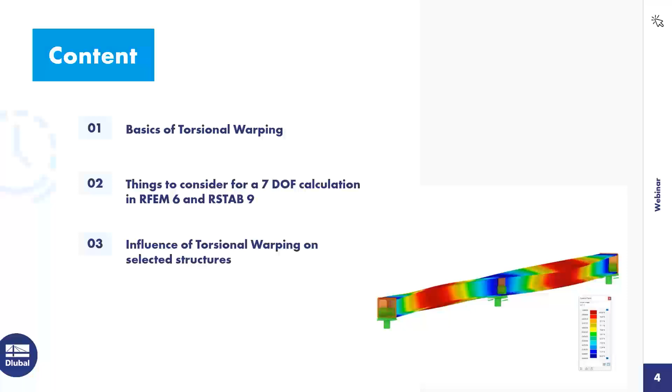So let's start with some fundamentals. In the general case, a beam that is loaded in torsion will experience twisting, shown on the right side if we look from the front on this distorted beam, and warping. If we look from the side, we see the warping deformation. This combined reaction to a torsional load is described as mixed torsion.

In a conventional spatial beam analysis, only 6 degrees of freedom per node, at each member end, are considered in the analysis. These 6 DOFs are made of 3 displacement degrees of freedom and 3 rotations. Warping is usually not part of the solution, and this is not special to our software, but is in fact the standard convention in most software solutions.

In RFEM and RSTAB, we can, however, very easily activate the 7th degree of freedom by just activating the torsional warping add-on. You may now ask why warping is not considered by default, when the general case for beams under torsional loading is mixed torsion, which also needs to consider warping. In fact, there are many practical cases where we can neglect it without making a huge error, and we will talk about that today. But before we get into this, we want to discuss the main features of the two load-bearing mechanisms activated and shown here on the slide: twisting and warping.

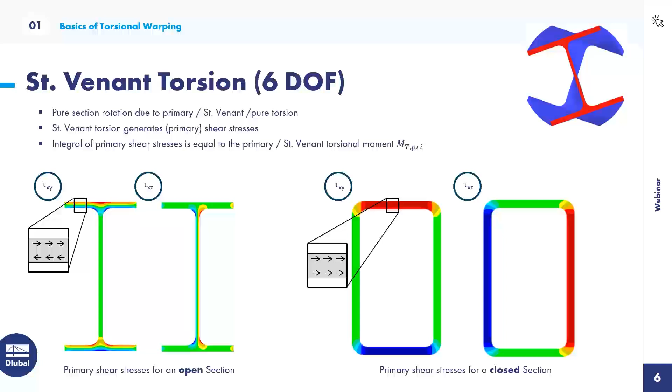Also, the shear stresses are oriented in the same rotational direction, and as a result, the primary torsional shear stresses are usually much smaller in closed sections compared to open sections when applying a similar torsional load. The integral of the primary shear stresses is equal to the primary torsional moment, mt pri.

Similar to axial bending stresses, the axial warping stresses need to be balanced by shear stresses. Those shear stresses that are required for equilibrium are called secondary torsional shear stresses.

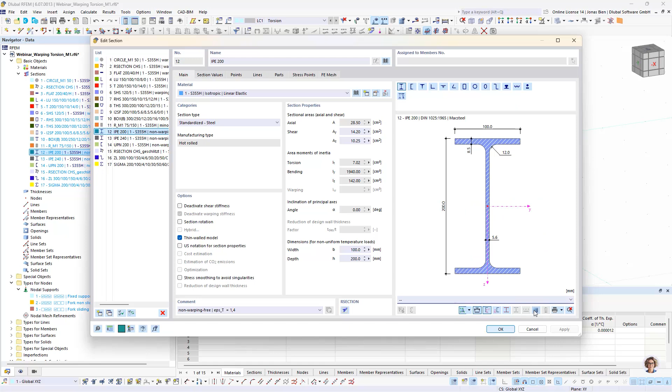Therefore, you just go to the section dialog, and underneath this figure here, you can see there are a lot of functions built into RFEM where you can assess something like unit stress distribution for finite element analysis. That's where the section is discretized in 2D elements. You can check the mesh here by clicking on this little mesh symbol.

And here you get, for example, the unit stress distribution over the profile for the primary torsional moment. Or you can check the same information for the thin wall analysis results, where we assume that the stresses are constant over the thickness and that the stresses are not zero at the edges. So this is also quite nice.

And we have access to several other functions, such as the warping, torsional warping function, and so on, that is affine to the warping deformation and the actual warping stresses if warping is restrained.

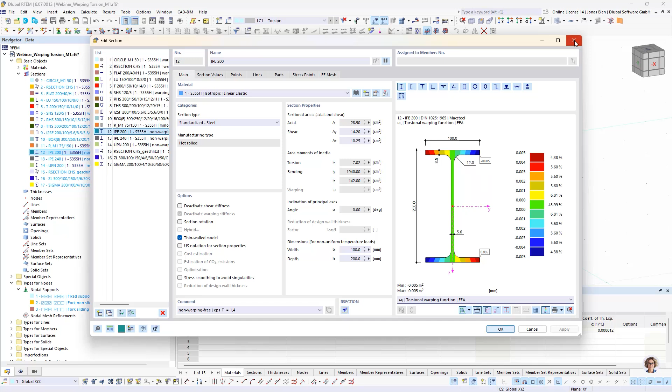Okay, but for now, before we start anything crazy here, let's go back to the presentation, because we have to clarify one or two more things before we go to the first example. All right, so what have we here?

This is basically, so we were talking about the primary torsional moment and the secondary torsional moment. In the introduction, I said that the general case has both of those parts, one from primary torsion and one from secondary torsion, and the overall torsional moment makes up of those two components. However, quickly the question arises how the relative magnitudes of the primary and the secondary torsion can be determined. So how are they distributed, both parts?

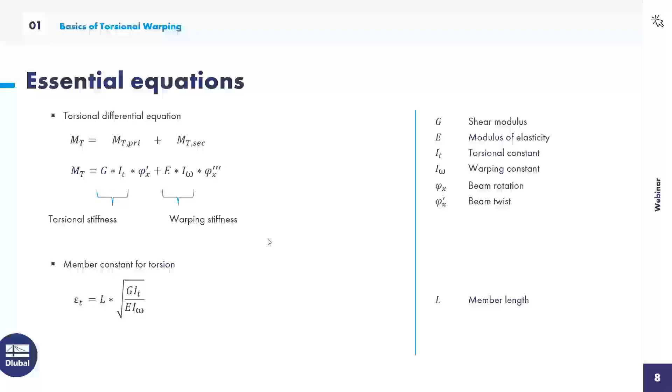So we clearly see that the section choice impacts whether warping torsion is relevant for our calculation or not. And for that purpose, it's common to categorize the sections that are available into 3 different categories, which I want to just quickly show you here.

Sections with a warping constant of 0 are called warping-free sections. Such sections do not show any warping deformation and remain plane under torsional loading. So the following sections are perfectly warping-free: the circular hollow or circular solid section, thin-walled cross-sections whose profile center lines meet at one point, like this L profile or the T profile, quadratic hollow sections with constant thickness, or which is a rather special and academic case, but some rectangular hollow sections with specific height to width and thickness ratios.

Then there is the second category, and that's the category of minor warping cross sections. So the warping stiffness of such sections is not 0, but relatively small compared to the torsional stiffness. Although a universally accepted definition of what is relatively small is not available, or at least is nowhere fixed in some standards, it is usually acceptable in civil engineering applications to neglect warping torsion for members with an epsilon t value or member constant for torsion value greater than 10.

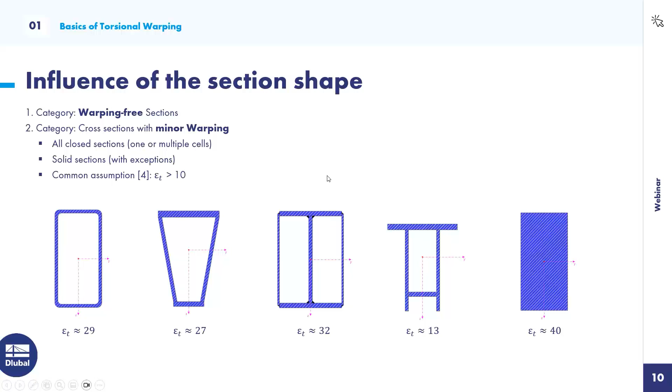So it's rather interesting for thin-walled sections made of steel. The category that is really affected by warping torsion is the third one, the non-warping-free section category. All open and thin-walled sections that do not belong to the first category of warping-free sections are actually non-warping-free sections, and they show significant warping effects under torsional loading.

Some very prominent steel sections, such as the I profile or the U profile, belong to this category. Also, cold-formed thin sections are very prone to warping, and you can see that the warping member constant, or the torsional member constant, is much lower than 1. So in some cases it's rather recommended for such sections to neglect the primary torsion rather than the warping torsion.

Now that we have gained some theoretical background on the influence of the section shape on warping torsion, we can move over to RFEM to make our first example and see if we can back up the information that we just gained with some simple example calculations.

So what have we learned until now? We have learned that we have 2 different types of bearing mechanisms for torsional loading: St. Venant torsion or primary torsion, and the secondary torsion, which goes along with warping torsion. And then we have an influence of the section, where we have 3 different categories, and only non-warping-free sections are, or can be assumed to be, prone to warping. We will check that out now in RFEM.

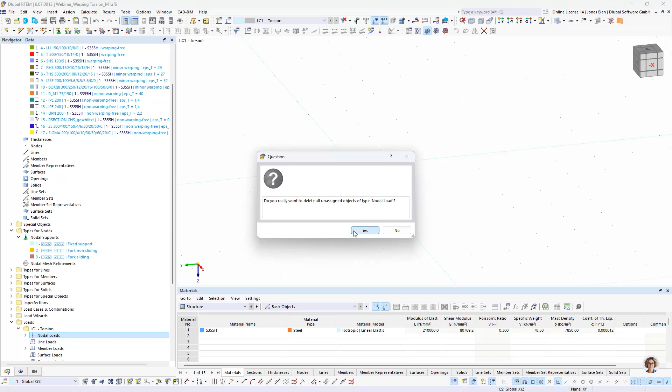And I have a first load case that shouldn't actually have any loads, so let's just delete those loads. And the load case does not have any self-weight active, so we just want to investigate simple examples under pure torsion.

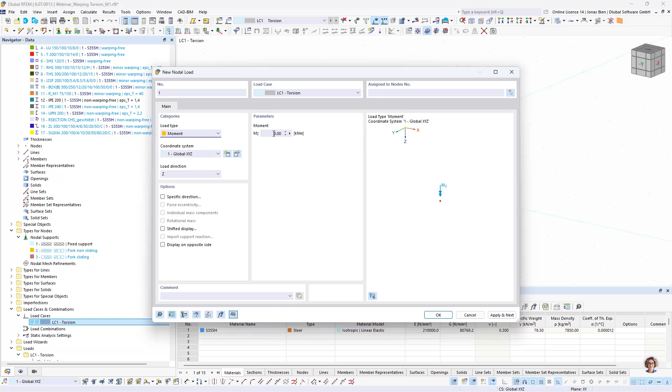So let's do so. I want to start with a very simple static system, and I want to model a cantilever beam with a non-warping-free section to see if we can already catch the influence of warping here in this very simple case. So I assign a fixed support to one of the nodes, and on the other end of this cantilever beam, I apply a concentrated moment of 1 kilonewton meter.

All right, and I think there's no add-on activated right now. So let's just do a blank calculation with 6 degrees of freedom to have some reference that we can come back to and compare the results with warping torsion active.

So I just click on calculate, and what we get now are the local deformations, internal forces, strains and stresses. But let's keep an eye on the local deformations and forces that are now calculated here. We can see that we have 6 of them — these are the 6 local deformations that are usually taken into account: 3 translational and 3 rotational.

And when we check those, it should only have rotation about its own member axis, about the x-axis. And when we look into the internal forces, we only have a torsional moment of 1 kilonewton meter, and this is constant from one member end to the other.

All right, so now actually let's add the 7th degree of freedom. Therefore, we just go to the base data of the model, go to the add-ons tab, and activate the torsional warping add-on, and run the simulation again.

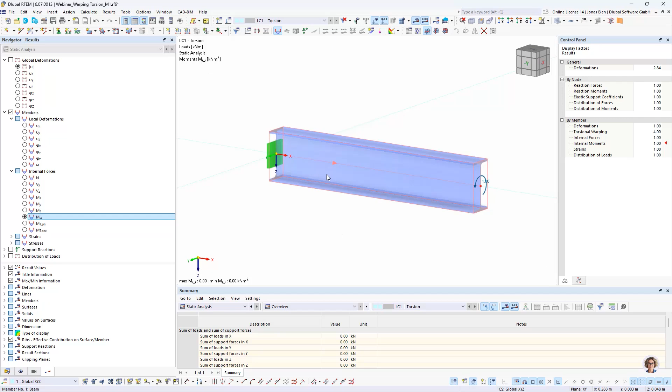But why is that? We just said that an I section is non-warping-free and is very prone to warping deformation and warping moments. So what happens here? Maybe that gets a bit clearer if we check the deformations here.

So we see that we have this twisting of the beam, but when we look from the side, and maybe let's scale this up a bit, we can now see that there's also warping in our section.

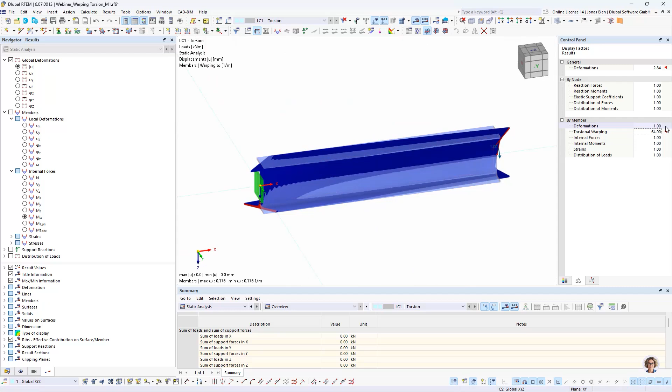We can actually see that the member warps at both member ends freely. We don't have any warping restraint here, and that's why this cantilever can freely warp at both ends. As long as we don't have any warping restraint, it's just deforming in this mode. But from this warping deformation, we don't get any additional forces or stresses in the beam.

So we can also check stresses. We don't have any actual stresses here. So what we need to really activate warping torsion is also to add a warping restraint. Let's see how we can do that.

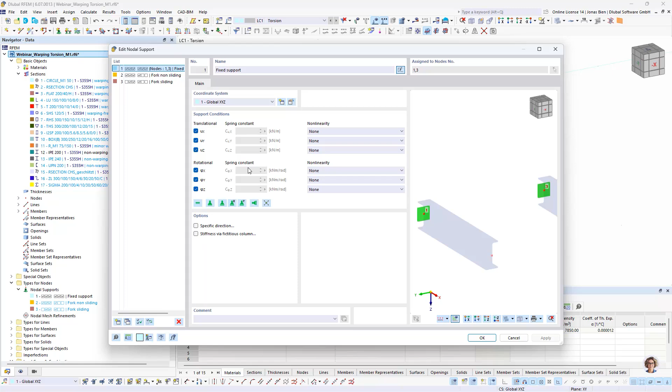I copy the cantilever, add a second one, and now I just want to quickly look with you into the nodal supports. But as you can see, even after turning on the 7th degree of freedom add-on, the warping torsion add-on, we still only have 6 degrees of freedom that we can constrain here in the nodal support. That's basically because the warping degree of freedom is highly a local one, and it only affects beams and not any like surfaces or volumes that you could also support by these nodal supports.

So that's why we actually put the warping constraint into the beam properties, attaching the warping degree of freedom to the member object. If we go to this member, I just double-clicked on it to open the Edit Member dialog, we can now set transverse stiffeners. Those are only available when we have design add-ons that use transverse stiffeners, or if we have activated our 7th degree of freedom.

And under those transverse stiffeners, we can define a new type of transverse stiffeners. Of course, we find some conventional stiffeners, what you would probably expect under this title, transverse stiffeners, some flat stiffeners, or maybe some angles or channel stiffeners. But what we also find here are warping restraints.

We want to take this to now add a warping restraint at the fixation of this cantilever, so at the left side. I just generate a transverse stiffener type with a warping restraint at x equal to 0, and I want to add a full analytical warping restraint. I could also insert a warping spring here and give some value here that I calculated based on maybe an end plate thickness or whatever. But in this case, we want to make it clear, and we want to have a full warping restraint. So I will just agree with that and say OK.

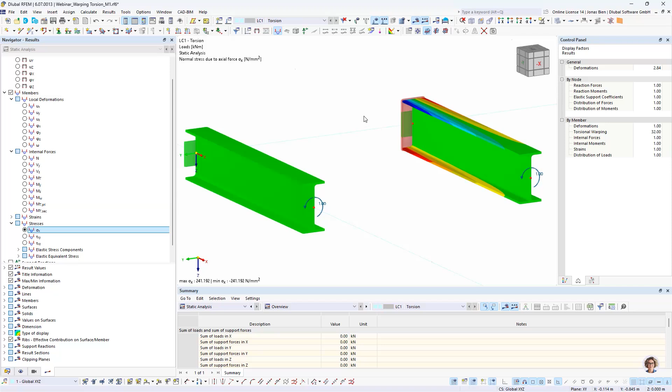We can also compare the rotation of both members, because what this warping restraint also does is increase the torsional stiffness of this member and the resistance against torsion. So we can see that at the free end of the cantilever, we now have rotations that are much smaller than in our reference system. It's more or less than half of the reference rotation.

So that's quite interesting. That means in this case we were actually now able to activate warping in the beam. So we needed a member that is non-warping free, and we needed a warping restraint.

So let's check what we have just learned about the different section types and add 2 additional cantilever beams with a warping restraint. We can keep that, but now we actually want to swap the sections for those additional members. And I want to model a section with minor warping.

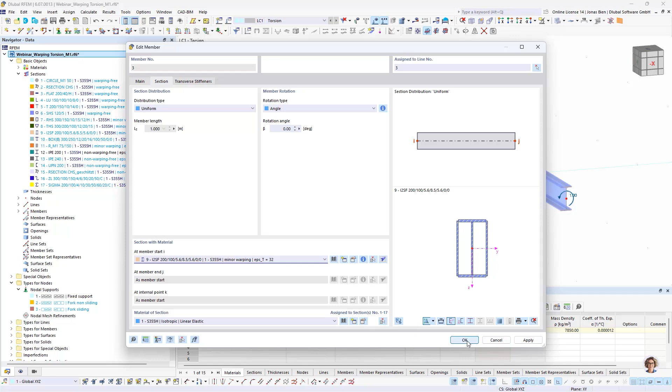So for that example, I want to take an I section with additional web plates, which makes a 2-cell section out of the I section basically, but it has the I section in the core with the same dimension as our IPE 200, more or less.

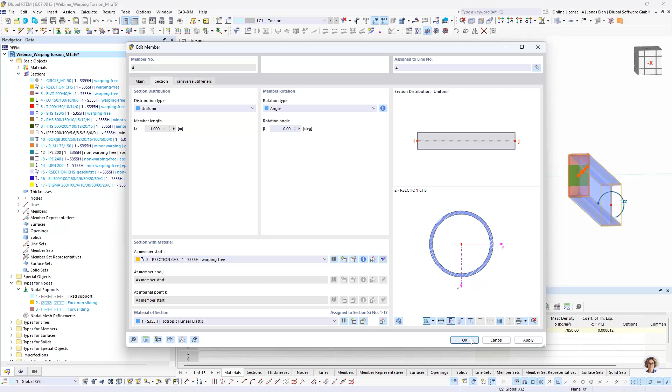And then let's also add a completely warping free section. So for that I want to take a CHS section, and now we can also compare how those 3 systems with a warping restraint, just with different cross-section, react to this torsional load.

So let's conduct the analysis again and compare how these different systems behave.

So again, just to check for sanity, we have a torsional moment of 1 in all cases, but the secondary torsional moment already in this case where we have the minor warping section is also 1 at the restraint, but in the vicinity of this restraint it very quickly vanishes. So that's actually what we expressed or what we learned about the decay factor.

We said earlier that sections with minor warping have a very high decay factor, and the secondary torsional moment vanishes very quickly in the vicinity of a warping restraint. And that's actually what we can see here by just comparing the member with an IPE section and with an I section and additional plates, which makes it a minor warping section.

And of course, if we then again think about the warping moment as the integral of this secondary torsional moment, the warping moment is much smaller than for the non-warping free section here.

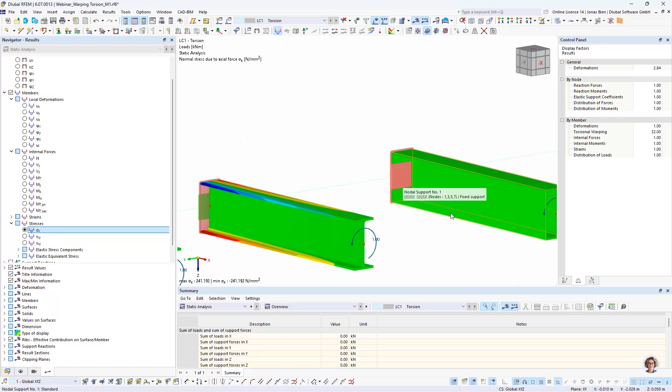And of course, this can also be seen when looking at the actual stresses that come from the warping restraint. So let's actually focus on this member just so we are able to see something on our scale. We have minus and plus 11 megapascal, which is just very small values compared to the 240 megapascal in our non-warping free section here.

And then go on with the warping free section. Here we actually don't see any secondary torsional moment, and of course, as a consequence of that, no warping moment and no axial stresses from this warping restraint, because this section actually doesn't warp at all. We can see that here also when we check the local deformations in the warping degree of freedom.

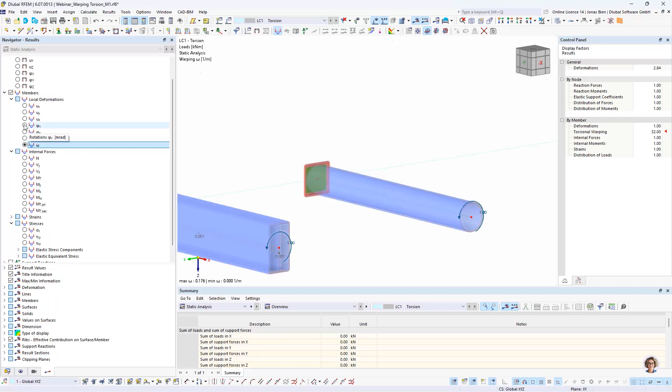And we can also compare the local deformations and see that our sections with minor warping or no warping—it's not perfectly comparable because this CHS section has a bit smaller diameter compared to the height of this section—but yeah, we can see the big differences between the rotations of these open sections and the closed sections.

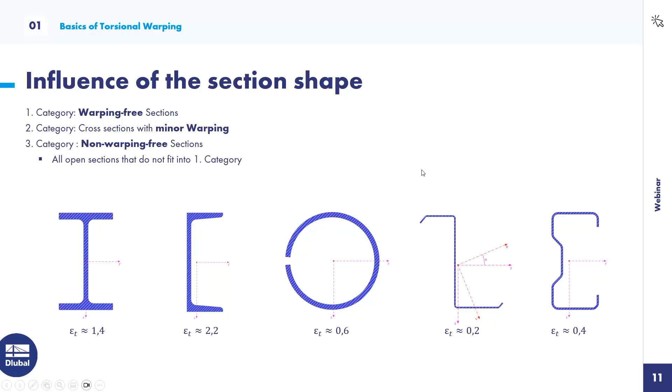All right, so now we learned not only about those different section categories and how they influence the effect of warping, but we also learned about the warping restraint. So we have now covered in the example a warping boundary condition, a full warping restraint at the end. However, there are additional cases or influences for a warping restraint.

So free warping can also be hindered by changes in the torsional or warping stiffness along the member. Here are two examples for that. For example, if we have a tapered member where the section size changes along the member, there we have a warping restraint basically—the neighboring sections restrain each other from free warping.

And the same goes for a discrete increase or change in torsional and warping stiffness if we actually include stiffeners along the member length. So such stiffeners can also act as a warping restraint along the beam, and we will also check this in the example.

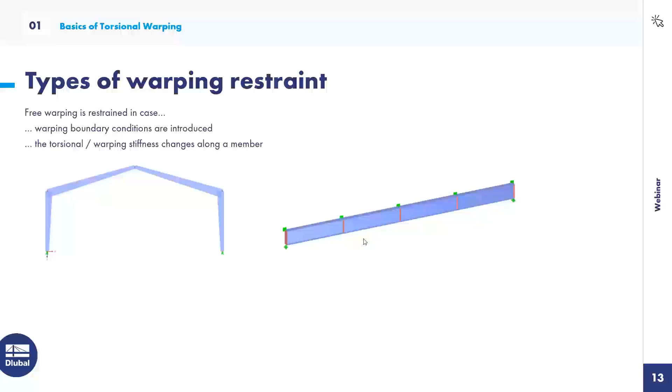But before we do so, let's check the third important type of warping restraint, and that actually comes from the loading itself. Whenever we have—so far in our examples, in the 4 examples that we have already modeled—we have just applied a concentrated torsional moment at the end, which means we had a constant torsional load over the member length. But in fact, all other loading types that result in a varying torsional moment along the member also introduce a warping restraint by themselves. So all of those 3 effects or parameters influence the reaction of a member that has a non-warping free section to our torsional load.

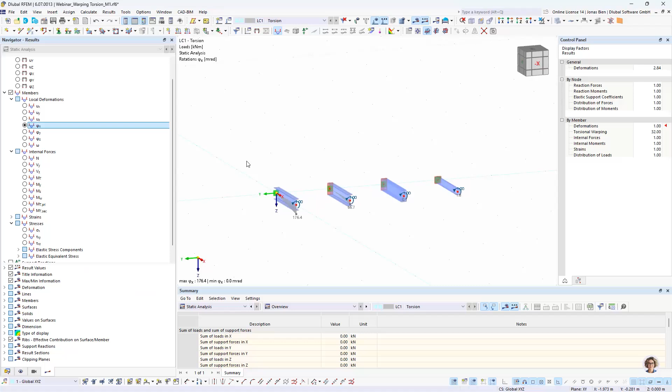What these cases have in common is that all of them lead to a situation where we have a non-constant twist over the beam length. Let's check this out and try how these other two additional types of warping affect the results. Let's go back to the model in RFEM and add some additional cases.

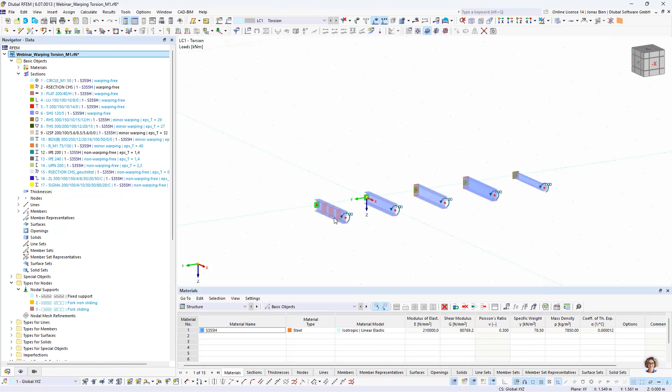We said that we have a warping restraint when we add transverse stiffeners along the member length. We can do that by activating transverse stiffeners, and instead of a full warping restraint, we now define, for example, flat stiffeners. Let's set the first flat stiffener at 25% of the member length, and add two additional stiffeners at 25% of the total length as distance between them. Let's increase the thickness of the flat stiffeners to 8 millimeters and assign it to this new member.

We can also check the influence of the stiffener shape, because that can be interesting. Let's add an option where instead of flat stiffeners we use channel or U sections as stiffeners, because these form closed cells along the beam length, and it's pretty safe to assume that those stiffeners have a higher restraint on the section. We can check that by introducing them and comparing the results for both cases. I've already defined this additional type of transverse stiffener, I just need to assign it to this member. Now we can see the difference of the stiffener shape.

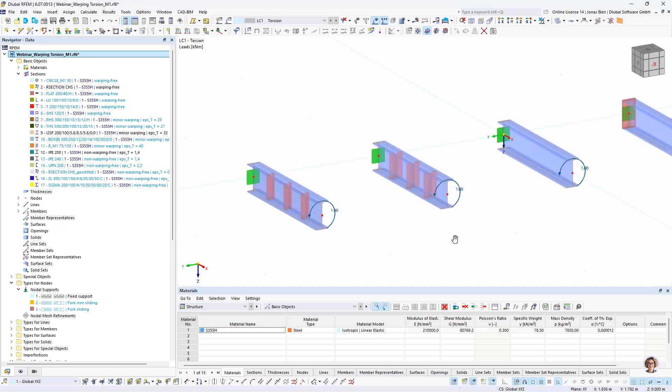Another example for changing torsional and warping stiffness can be a tapered member. Let's add an example to take this into account. We add another cantilever with a linear section distribution type, and at the member start we increase the member size to an IPE 240, while at the free end we keep the IPE 200. So this beam now has a linear cross-section distribution, from a small cross-section to a larger one.

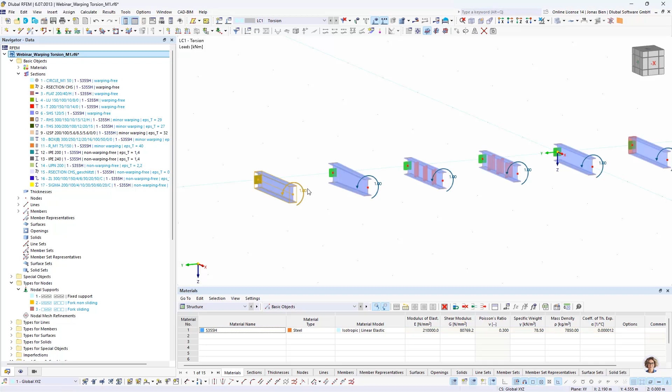Another warping restraint could be induced by the type of loading. So instead of applying a concentrated torsional moment at the tip, let's add an example where we apply a uniform torsional moment load along the member length, which will give us a varying torsional moment over the length of the member.

Now let's run this calculation and check how these manipulations affect the behavior, or the load bearing mechanism, in torsion. Again, everywhere we have a maximum torsional moment of 1 kilonewton meter, but let's check how much is now going into secondary torsional moment.

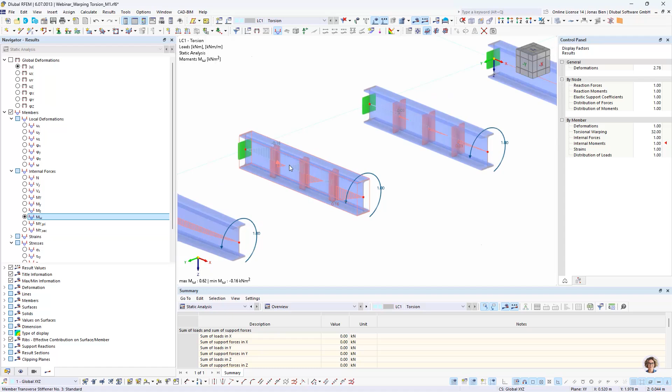With our transverse stiffeners, we have quite some share of the torsional moment now going into secondary torsion, and this share is much increased by introducing closed stiffeners. Here we have almost 70% of the torsional moment going into secondary torsion. Of course, this also leads to higher warping moments and, in consequence, higher axial stresses coming from this restraint.

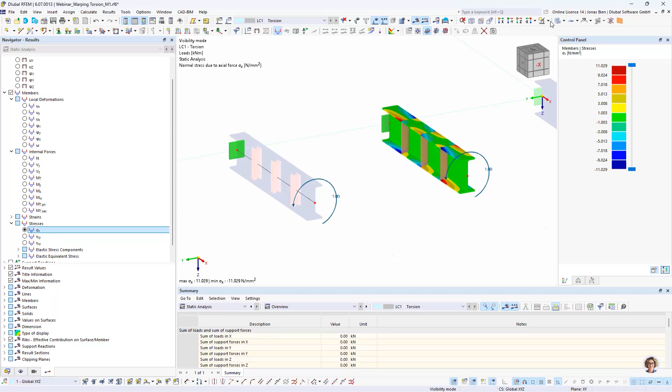Here we can see it, though the differences are probably too small to see on this beam - we'd need to focus on it. We can see there are some stresses added or introduced by this restraint, but not as much as for the closed cell stiffeners.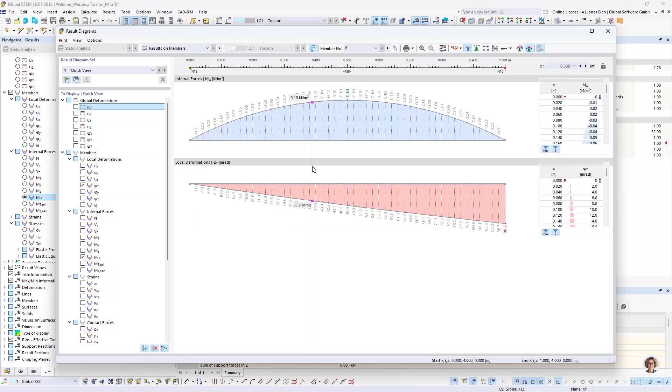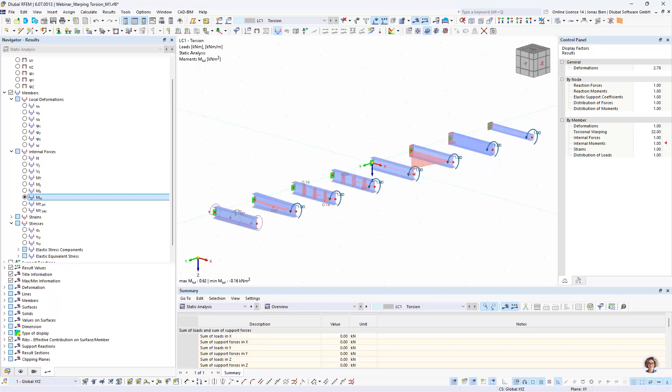To conclude with the first example, let's check how the section choice, but also the different types of warping restraint, affect the resistance of such a cantilever beam to lateral torsional buckling, because that we can also investigate with our 7th degree of freedom. If we add it, we have the correct kinematics between the torsional degree of freedom and the bending degree of freedom. And it's quite simple, we just add the structure stability add-on.

We just activate it. Then we probably want to generate a second load case where we don't load the cantilever in torsion, but in bending. And now instead of this concentrated moment at the end, we just apply a load of 1 kilonewton in Z direction at the member end, which will give us a maximum bending moment at the fixed point of 1 kilonewton meter.

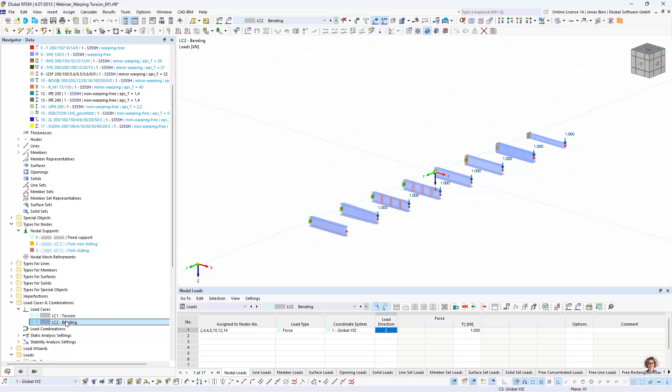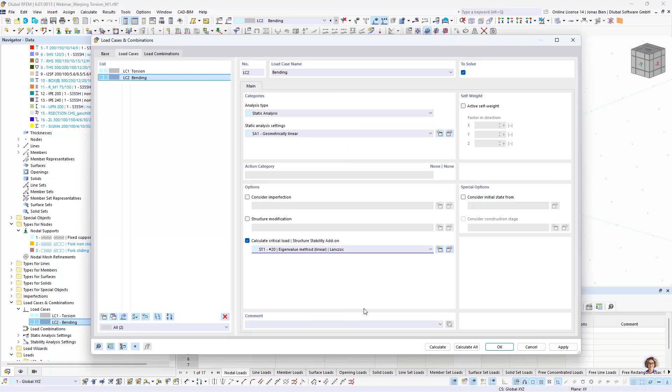But we are not only interested in the static analysis result, we also wanted to check the critical bending moments, and those we can get by assigning a linear eigenvalue analysis to this load case 2 that we just generated. I think 4 eigenvalues are not enough, so I will just increase the number of eigenvalues it should calculate for this example, so we can see the eigenshapes of multiple beams and investigate and compare them.

And that's basically it. So we now not only get the results of the static analysis, we can quickly check how the internal forces are. Now we have no torsional moment here, we just have bending about the strong axis, and we have a maximum bending moment at the fixation, or at the boundary condition, of 1 kilonewton meter.

But now we also get the stability analysis results, and this gives us the eigenshapes and the eigenfactors. Those eigenfactors, or critical load factors, are the values that we can multiply the internal forces with to get our critical load. So that would mean that for this reference case, a bending moment of 208.7 kilonewton meter at the fixation would be our critical moment.

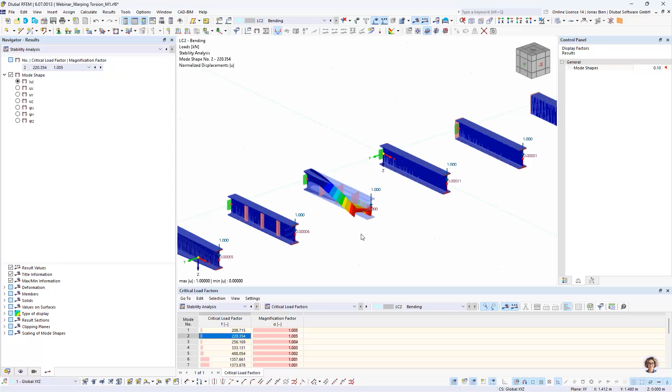So we see this is also the member with the lowest critical moment. If we browse through the results, we see the stiffeners, the flat stiffeners, increase the critical moment a bit, so the resistance to lateral torsional buckling is slightly increased. Then we have the tapered beam, which is a bit higher than the beam with our U-shaped transverse stiffeners. That makes a large difference.

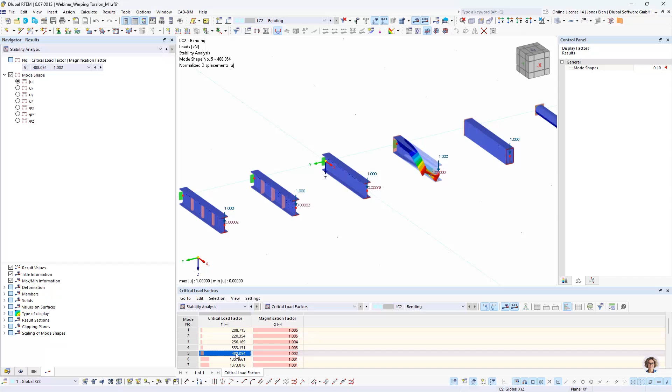Also here in the investigation of lateral torsional buckling, if we compare the flat stiffeners and the U-shaped stiffeners, it has a huge impact. And then we actually get the lateral torsional buckling of the cantilever where we applied this warping restraint at the end. We can see that by doing so, our lateral torsional buckling capacity has more than doubled, from 210 to 490, more or less. That's quite interesting to also see the effect on lateral torsional buckling.

And then we can browse through, we get some higher modes. Let's see if we can get one for the minor warping section here as well. Yeah, and there it is. So for this section with minor warping, of course we get an eigenvalue for lateral torsional buckling, but the critical moment is so high, it's almost 6,000 kilonewton meter, compared to the other configurations where we found the first eigenshapes around 2 to 500 kilonewton meters. Such sections are just less prone to lateral torsional buckling, as this small example demonstrates.

And then I don't think we should find an eigenmode for the warping free section. No, we don't. So this actually does not buckle at all. All right.

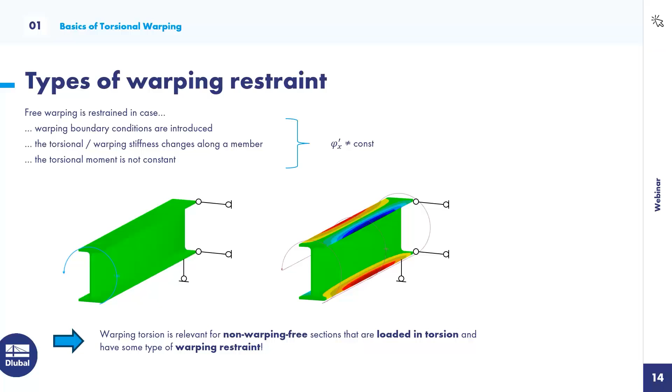So just as a repetition, let's jump back to the slides. Yeah, what we just did, so to check stability modes, torsional buckling, or in this case, lateral torsional buckling. As I said before we started with the example, we need to consider the warping torsional degree of freedom. Otherwise, we wouldn't get any results for this linear eigenvalue analysis, because only with 7 degrees of freedom, the kinematics of the beams loaded in bending, axial force, and torsion are properly taken into account.

And I want to show you another example where this is quite important, and it is not related to this case of torsional stability, but it's maybe a much simpler case that you and I would probably stumble over in regular analysis.

So in the second example, I want to model a single span beam with a uniform vertical and horizontal load. Let's do that. We go back to the program. I will delete most of the members here, and then we can just take this member and transform it to a single span beam.

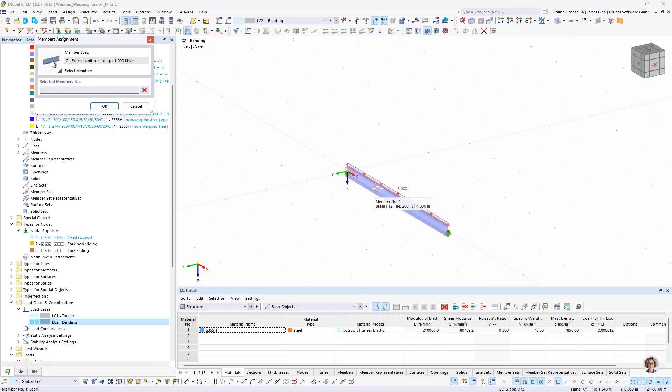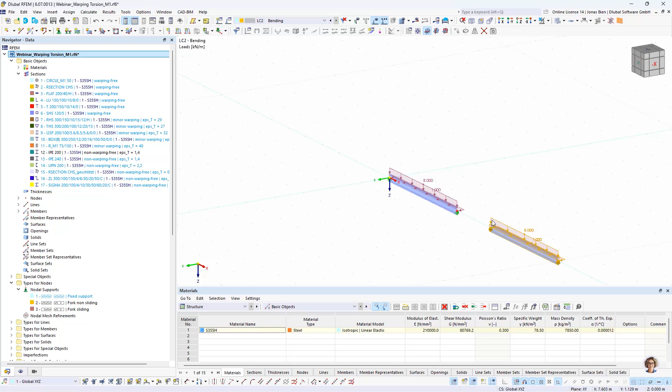We can even switch off the structure stability add-on, but we can take into consideration second order effects just to be sure we don't miss anything. But to show you what we would capture with a regular 6 degree of freedom calculation, I'll switch those add-ons off. And I copy this member twice so we can compare the case of biaxial bending with the uniaxial bending cases.

So we will now just conduct this simple simulation. The static system and the loading conditions are quite simple and are encountered probably in many situations. You could think of purlins or rafters that are maybe rotated around their axis, or maybe a corner column that is loaded from two sides due to wind loads.

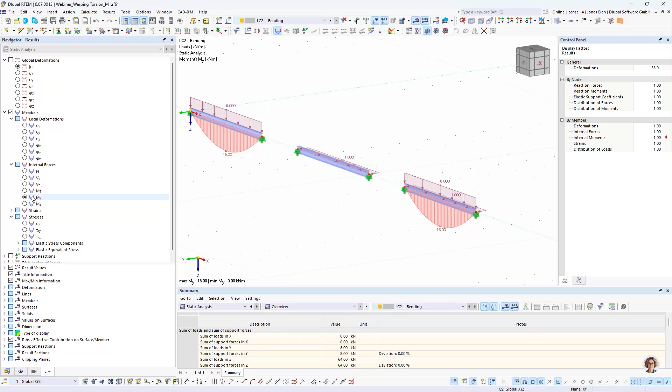That could be a situation where such a case of double bending could occur. So let's check the bending moment about the strong axis. We have it in our first and third system, where both are combined. The second and third case also have bending about the weak axis. Of course, we have some shear forces that fit the bending moments, and a very small portion of axial force due to the rotation of the beam — a portion of the shear load goes into normal force, but that's negligible.

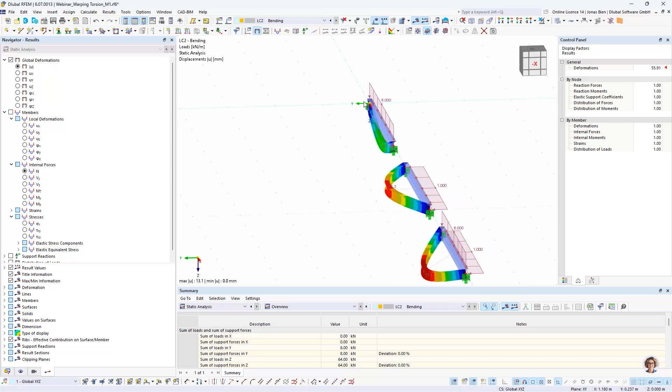Also, when we check the deformation shapes, we see the first system bends in Z direction, the second one in global Y direction, and the case with loads applied in both directions is just a superposition of this deformation. So we get bending about both axes, but we don't see any rotation here. That's also supported when we check the local deformations — we don't see any rotations on any of those members.

Okay, but what happens if we now activate the 7th degree of freedom? Let's do that. I will just activate 7DOF and run the simulation again.

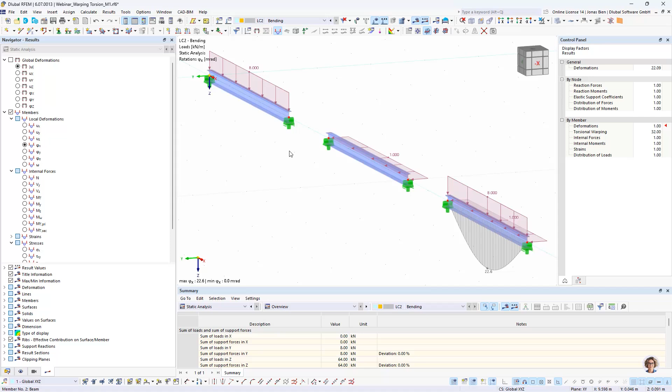Here, I've left on the local deformations about the x-axis of the member, and we can already see that for our member under double bending or biaxial loading, there are actually now rotations. And if we check the global deformations, we can clearly see that our member is now also twisted towards the middle.

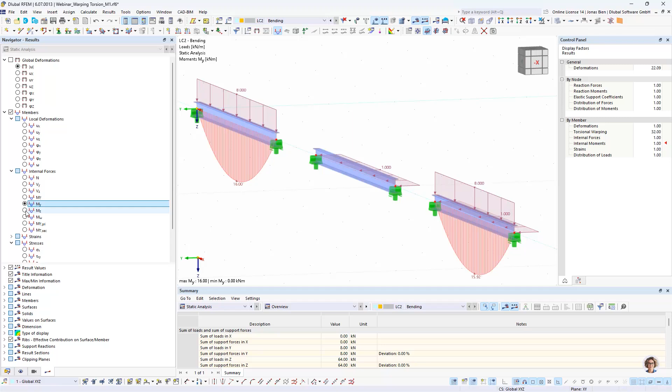But now we actually also have a torsional moment, and because we don't have a uniform or constant torsional load along the beam, we should also have a share in secondary torsional moment, which would give us some warping moment over the member length. We can only capture this effect — the combination of bending and torsion, this hidden torsion that's not directly applied. We didn't apply a direct torsional load, but due to biaxial bending we get some indirect torsion, and we're only able to reveal it through analysis with 7 degrees of freedom.

Of course, I also activated second order effects — these are required as well to capture those effects. I don't want to make you nervous and say that double bending always has a critical influence on the design. I just want to raise awareness that if you have double bending or biaxial bending, there's probably, at least if you're working with non-warping-free sections, some indirect torsion generated by this loading condition.

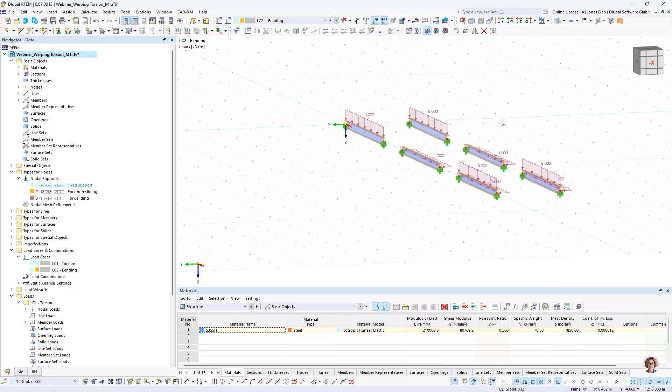This is true for all cases where you have different moments, or two different moments. So for example, we can check the same case but just apply bending about the strong axis together with the torsional moment along the beam axis. Let's add in a second case: bending about the strong axis and torsional moment.

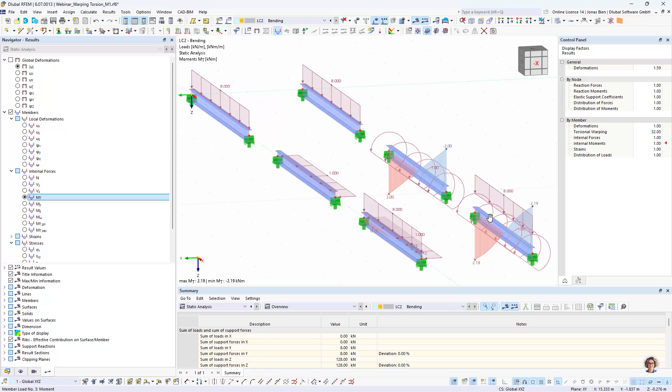We should see in this case, with 7 degrees of freedom and second order effects, we get our third moment component. So we have bending about the strong axis, a torsional moment, and in the combination of those two, we have a significant portion of bending about the weak axis that is now generated, when we consider 7 degrees of freedom and second order effects.

So it's good to know - just keep in mind, if you're working with non-warping free sections and you have 2 moment components, it might be reasonable to check for the third moment component by switching on warping torsion degree of freedom and second order effects, and see how large the influence is.

All right, so the remainder of the time - this leaves us with 2 examples done. The remaining time I would like to focus on some additional peculiarities that need to be considered when setting up a 7 degrees of freedom calculation in RFEM and RSTAB.

Along the way, until here, we have learned how to activate the 7th degree of freedom, how to apply boundary conditions and stiffness or discrete warping restraints along a member length, and also how to assess the results for warping torsion. So far, in our examples, we have only used sections that are double symmetric, and this means that the shear center in this case aligns with the center of gravity.

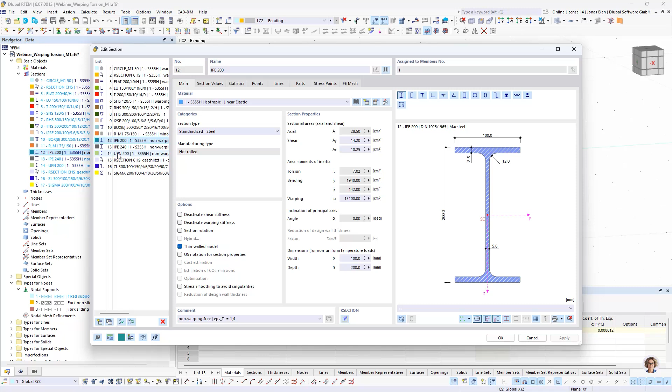So if we check the properties of this I section here on the right side, we get this nice figure, and we can also activate the visibility of the shear center. Shear center and center of gravity are coinciding, and this is of course not always the case. For example, if we have a U profile, we have quite some difference in position between the shear center and the center of gravity. For this example, there are almost 40 millimeters distance between those 2 points.

So let's check what happens if we are dealing with a section that is not double symmetric, but has a different position of the shear center with reference to the center of gravity.

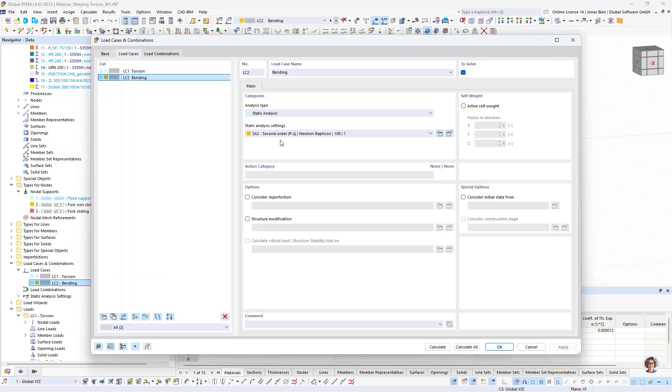Let's start again with the 6 degrees of freedom analysis. I will switch off the 7th degree of freedom. We will start with a regular analysis. I will also cut out the second order effects just to make it a bit more clear what effects we are looking at, and run this simulation again.

So now we have this U section here, single span beam with the load in Z direction. And if we do this analysis with 6 degrees of freedom, we only get a bending moment about the strong axis, which is maybe what you would expect, and which is, I would say, the same in other beam analysis software - that by convention for such a system we would only get bending about the strong axis.

And this is because transversal loads are usually by default - maybe you have never thought of this - applied in the shear center. So there's no eccentricity or lever arm of the vertical load in this case to the shear center.

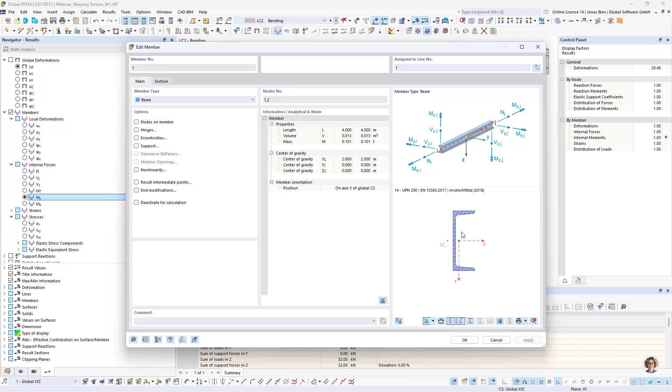However, if we now activate the warping torsion add-on, this default behavior changes, and with our 7 degrees of freedom simulation activated, all loads are applied to the center of gravity. This now leaves us not only with a bending moment about the strong axis, but also generates torsion - a torsional moment now. And of course, here we don't have a constant torsional load. Also, what we get is a secondary torsional moment and a warping moment.

And if we think about the last case, if we would consider a second order theory or nonlinear geometric solver, then My and Mt together would also give us some component of bending about the weak axis. But since we have now neglected second order effects, we don't get that actually, but that would be the full set of results. So by just applying a vertical load with default settings, we would get all moment components basically.

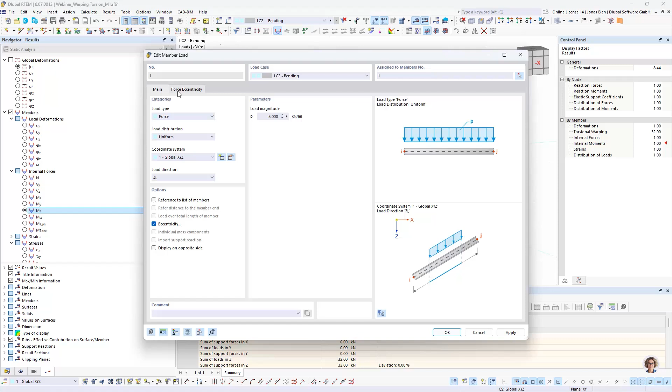Of course, we can change the default behavior by applying an eccentricity. So we could say here we want to apply this force to the shear center, and then we wouldn't have a torsional moment, and we could do it the same way in a 6 DOF analysis. It's just important to keep in mind the default settings are different, and if you activate a 7 degrees of freedom simulation, you should think about these eccentricities and whether they make sense or not. But this, of course, largely depends on the load application and how you would do that in the real structure.

Not only are the loads applied to the center of gravity when we turn on the 7th degree of freedom, but also the boundary conditions now all act at the center of gravity. In the normal 6 degrees of freedom analysis, the support in the transversal beam direction is also set into the shear center. That's why with 6 degrees of freedom, we don't get any torsional moment or torsional reaction load at the support.

With 7 degrees of freedom, we get a torsional moment in the beam because this load has some lever arm to the shear center. Due to these eccentricities, we have a torsional moment in the beam, but we still don't have any reaction moment, rotation about the global x-axis or torsional moment about the x-axis, because the nodal support is also sitting in the center of gravity of this section. It has no lever arm.

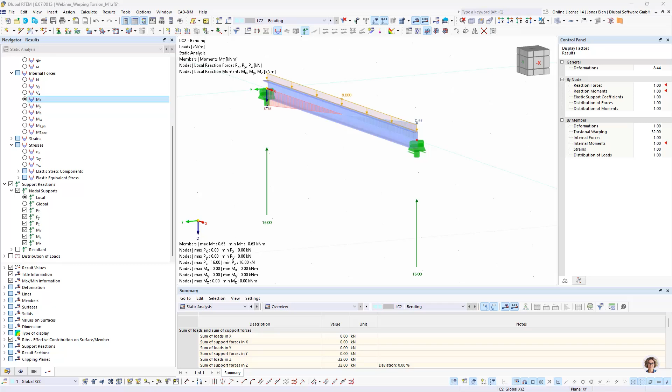Let's move on to the last topic, because what we haven't considered yet is how multiple beams or members are coupled to each other. How is the warping degree of freedom transferred from one member to the other, and how can I influence the default behavior? Let's dive into this.

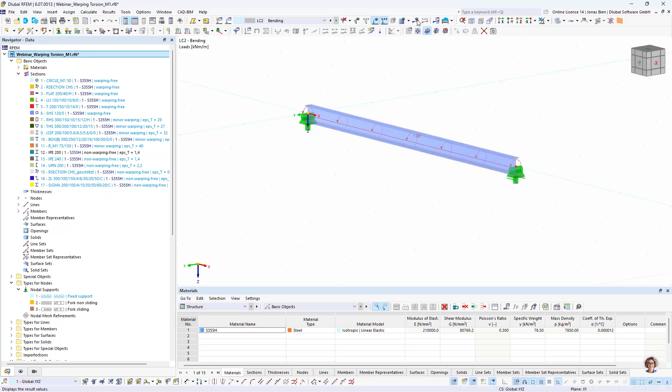Let's again make this an I section to keep it simple and clear. We change back to our double symmetric section and apply a constant moment load of 1 kilonewton meter per meter. With 7 degrees of freedom turned on and first order theory simulation, we should get a torsional moment with both primary and secondary effects, since it's not a constant torsional moment. Let's disable the support reactions so we're not confused, and we should also have a warping bimoment.

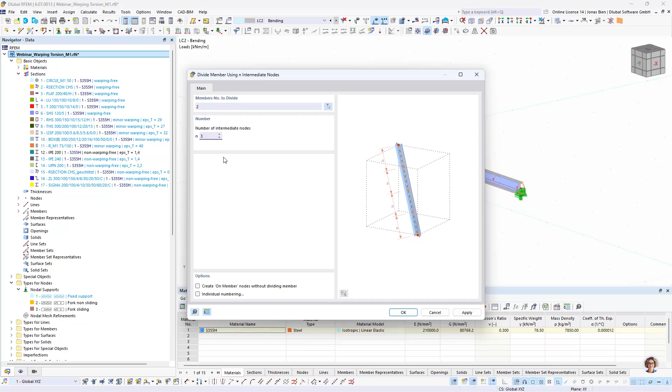So what happens if we take this member and split it, let's say 3 times, or 4 times. Let's introduce 3 intermediate nodes, which results in 4 members now that are equally loaded as before, but we just have additional nodes.

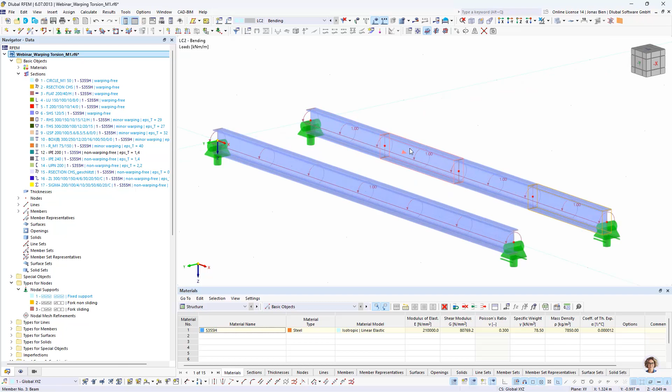The default behavior for all other degrees of freedom is that when I connect members at a common node, all forces are transferred. All bending moments are transferred from left to right, and axial force and shear forces are all transferred from one member to the other, as long as I haven't defined any member hinges.

However, for warping this is slightly different, because we assume that at member ends we have a warping hinge by default. When we compare the results, we see that at the intersections between those members at the intermediate nodes, our warping moment approaches 0. So this is basically a warping hinge introduced every time we split a beam.

And the reason for this is that oftentimes we would assume there is a warping continuity between two beams or members. Between this and this member, I would assume the warping degree of freedom is continuous, because warping is transferred mainly by the flanges, and the flanges are continuous.

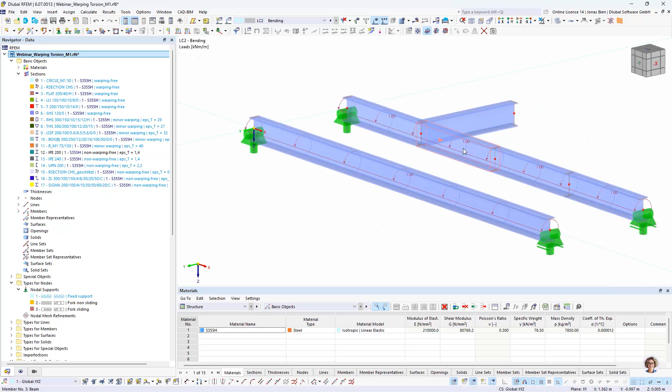But there are equally many cases where this is actually not true. So if we have a member connecting from the side here, at this point, it wouldn't be so clear how the warping degree of freedom, transferred by the flanges, is transferred to the member running in the other direction. Same could be true for a column placed here, where it also would not be trivial to define how the warping degree of freedom should be transferred between one member and the other.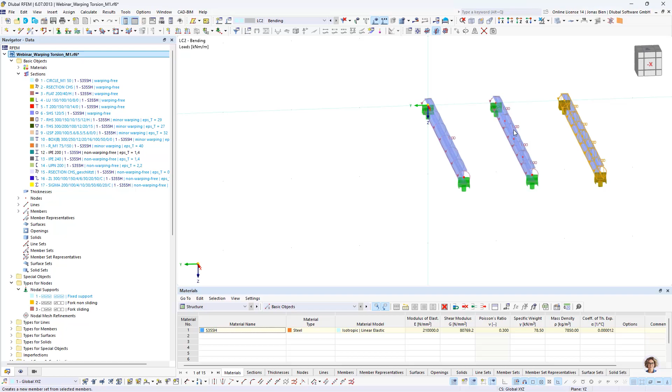So the basic behavior, or what we decided in our software, is that we uncouple the warping degree of freedom between adjacent members. But what we can do, if we want to couple them, is generate a member set, grouping them into a member set of the type continuous member.

If we do so, we see this indicated by these dashed lines, and we run the simulation again. This third configuration should give us the same results as the first one. We can see that now at the intermediate nodes, we still have some warping moment transferred from one member to the other, and we get the same results.

So be careful whenever you work with 7 degrees of freedom. The default behavior is that the warping degree of freedom is not coupled from one member to the other. In many cases it's not very trivial how the warping degree of freedom is transferred, and we can couple them via this member set by grouping them up.

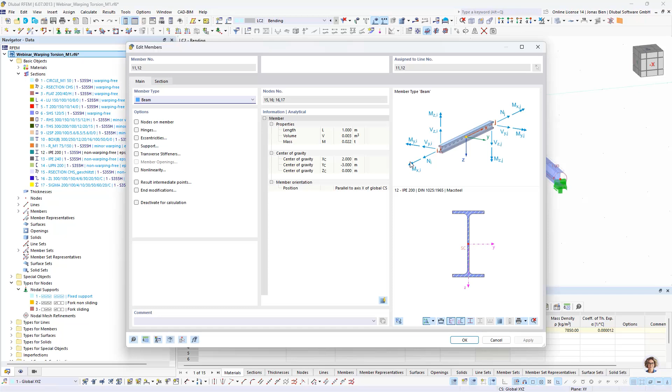But what actually happens if we have some discontinuity in this beam? For example, what happens if we have a different section here in the middle of this member set - an IPE 240 instead of the IPE 200. Now, thinking about how the warping degree of freedom is transferred for this I-section, we said it's transferred through the flanges.

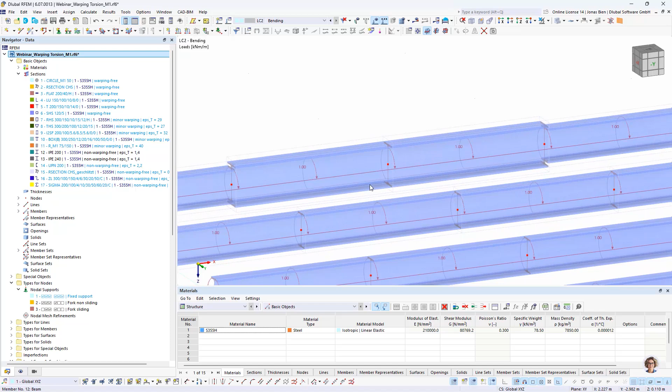Then there would be some gap here. At least in our simplified beam model, there would be this gap, and it wouldn't be clear how the program should treat this.

In this case, even if we coupled them in a member set, it would give us a plausibility check warning saying that the topology of the member or the orientation is not compatible, and continuous warping cannot always be assumed. That's how you should read it. And I can still ignore it - by pressing ignore, it will still assume continuous warping here. But it's just giving you a hint that there is some discontinuity and you have to look into this.

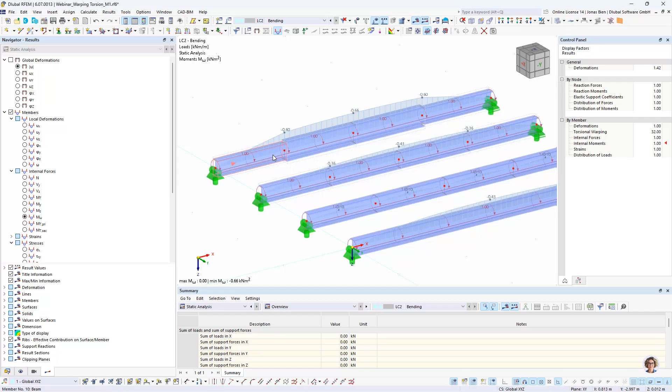Many times the actual way the warping degree of freedom is coupled depends on constructive details. For example, how does your detail in a member-to-beam connection look like? This very much influences the coupling conditions for warping torsion, and we can also check this here in this example.

So if we are in doubt or have no idea how the warping actually should be coupled, and we want to investigate it further, in many cases it's just engineering judgment. Probably here, this beam would also be loaded in bending, so you would definitely put an end plate here, or elongate the flanges of the smaller section into the larger one.

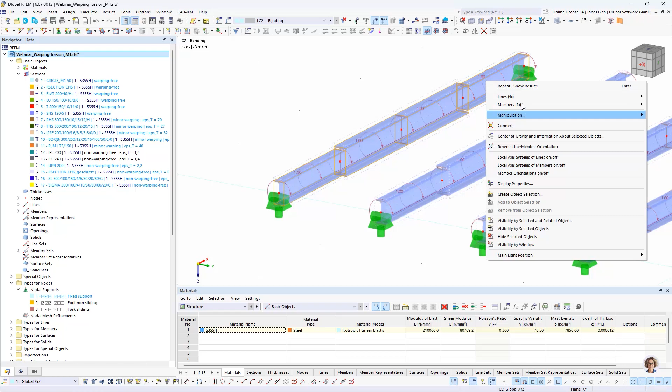But if you want to see the influence of such constructional details, what you could do in RFEM, quite easily, would be to make a surface model of this member. This is also easily possible by just generating surfaces from these members, and then you would have a nice set of surfaces where you could start your surface analysis from.

But due to time limitations, I would now jump over to a model that I have already prepared, where I have done all the work already - applied proper boundary conditions, applied a proper mesh, changed the torsional load to a pair of line loads on the surface. So we can see here, this would be my surface model.

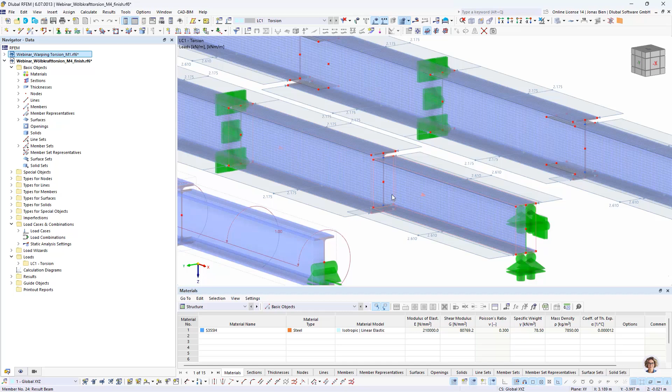And now I have created two situations. One where I just left the surface model as it was when I generated it from these members, where I basically have a gap between the flanges. As I said, nobody would build that in that way, and it doesn't make any sense because also bending continuity would be a problem here in this case.

But then I have the second option here as well, where I just elongated the flanges of the smaller section into the larger one. And as an additional step, I have defined some result beams on top of this surface model. What this result beam does is integrate all the stresses from the surfaces and give us internal forces.

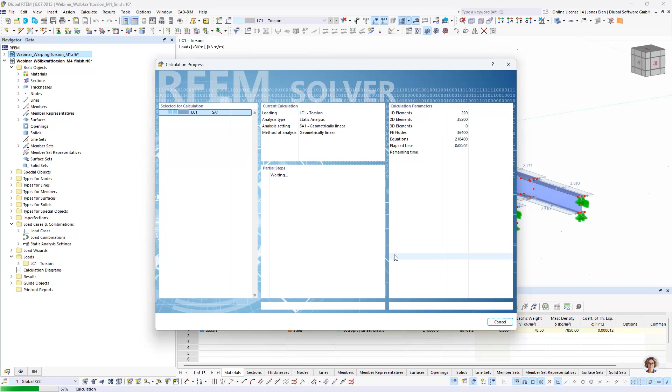This also works in combination with the 7th degree of freedom, so we will also get the warping moment when we use these result beams. This means we can now just run the simulation. It gives us a warning because we have some configuration where we have different sections in one member set, but we now can very conveniently compare.

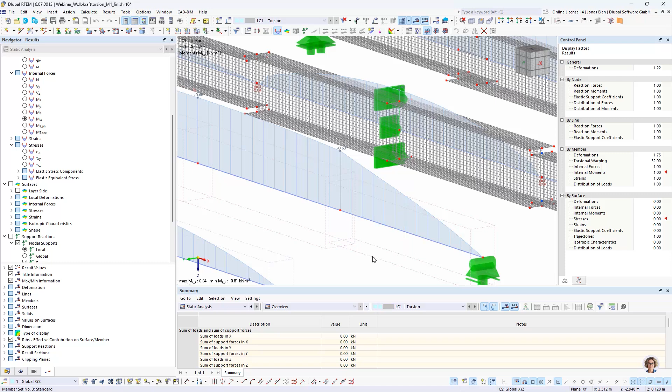Let's switch off the surface results and the loads maybe to have a better overview of the situation. We can now very well compare the warping moments for those configurations.

So here we have the beam model with continuous warping. It's minus 0.6 kilonewton square meter in the beam model case. Then in the first surface model case, where we don't have any connection between the flanges, we actually see that the warping moment in the connection between those two members is close to zero.

In the result beam, when we integrate all the axial stresses about the shear center, we don't get any warping moment whatsoever. Then the third configuration, where we have elongated the flanges of the smaller section into the larger section,

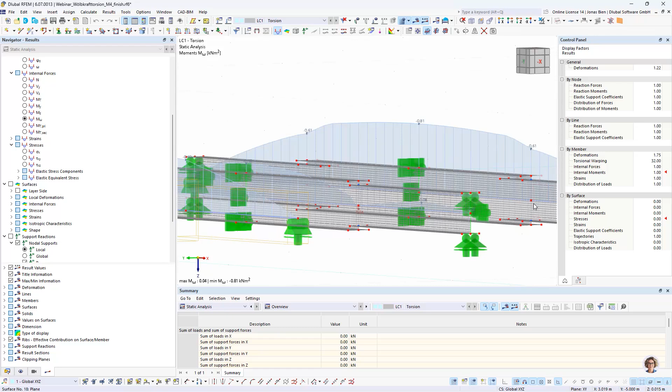we actually can see that here we have pretty much continuous warping. We even have a slightly higher warping moment at the middle, because here we have a section that has a much higher torsional stiffness, with 4 flanges. So these are taken into consideration also in this shell representation here.

But yeah, as I said before, this is just a stupid idea to do this connection like we assumed it here in this shell modeling approach. But it shows that the constructional details very much influence what assumption is correct for the coupling of the warping degree of freedom.

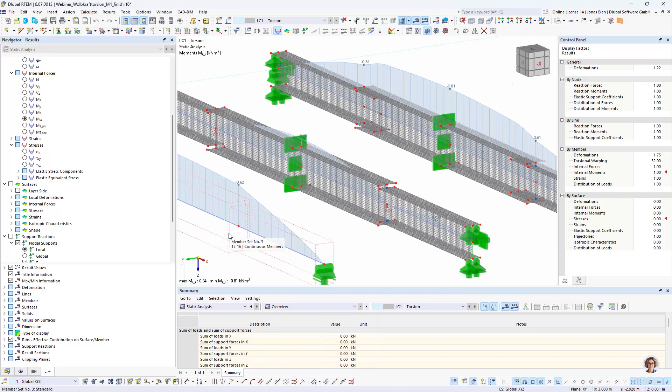I mean, the same goes for connections between beams and bending and shear and so on. Of course, the constructional details need to fit with the modeling assumptions. But yeah, all right, so I think this was also quite interesting.

The most important thing from this example is, if you switch on 7 degrees of freedom, make sure you have your coupling conditions between the members right. So you have continuous warping wherever you want by applying these, or by grouping members into member sets.

And with this being said, I would like to close this webinar, at least from my side. I think it's enough input for your convenience and to have a better overview of what we have talked about. I prepared this little summary where I basically put all the important things you need to consider when switching from 6 degrees of freedom to 7 degrees of freedom.

You can treat it like a little cheat sheet that you can print out or open when you do such analysis, and check for the most important things that I've summarized here.